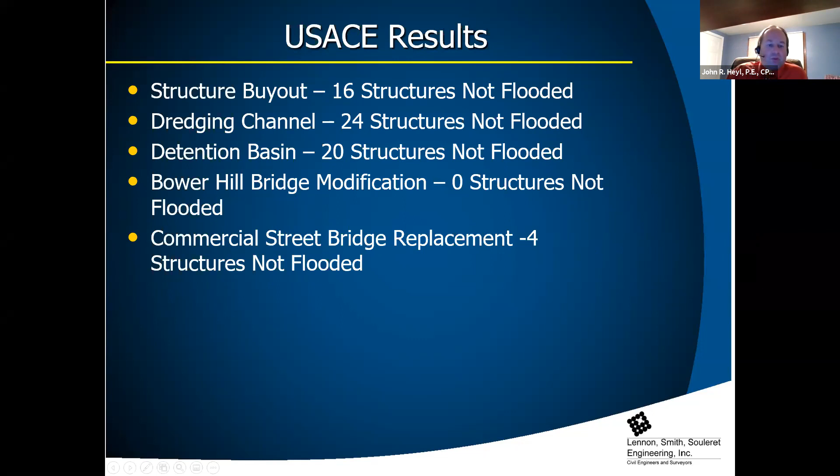So we took a little bit of a different approach at it. We reviewed all the scenarios that the Corps came up with. I dug into the model very deeply, did a little bit of preliminary work, ran some scenarios, some off-the-wall scenarios just to see what would happen, some realistic scenarios, and paid attention to what the back channel of Chartiers Creek did to impact the stream, what McLaughlin Run itself does, how it impacts the stream, and how the different bridges and stuff impact the stream.

So I truly understood what was going on before we came up with any alternative scenarios that we were going to actually model. We identified the critical restriction points within the stream, and then obviously I spoke with the borough staff, Public Works, a number of the council members and stuff. We went around and actually walked the McLaughlin Run corridor and looked at a few of the critical areas.

So some of the options that we looked at were construction of earthen levees to keep the water within the stream and no longer flood the structures, structural levees, bridge removal and replacements for the Bower Hill Road Bridge, Baldwin Street Bridge, and Commercial Street culverts.

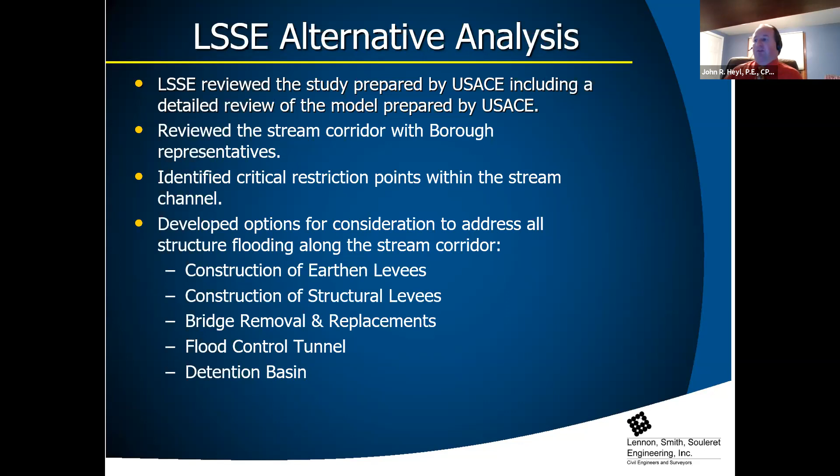I also looked into the detention basin up at McLaughlin Run a little more, to determine if there was a way to make that work to actually stop the flooding. The size of that detention basin would need to be up to 3 times the size of the ball field area, and we don't have that much property, so that became pretty much a non-starter.

But while we were doing all this, we were actually working with the borough, and we did a bunch of projects already. We've got some projects implemented, some getting ready to start, and we're going to have 2 meetings tomorrow to kick off 2 projects.

But the restrictions we truly identified as problems were, obviously, the Chartiers Creek back channel is the first and foremost problem. If the water is not flowing through the back channel, when the water from McLaughlin Run comes to meet it, it's got nowhere to go, and the model shows that very well. When you run the model, you'll see the back channel has a huge effect all the way up and beyond Bower Hill Road. If you were to completely eliminate Chartiers Creek, the water surface elevation in McLaughlin Run would drop exponentially, but obviously we can't eliminate the flow from the back channel.

Hey John, it's Tim. Can I ask you a question really quickly? Because I think it's important to the context here.

When you say you ran the model, or we would need 3 times the size of the existing, are you assuming the 100-year event is the input there? Yes, I'm sorry, I was going to get to that shortly, but yes. The 100-year model is what we're looking at. We can run the 2, 25, 50-year models too and see what they do, but I wanted to use the 100-year model. I don't want to call it the largest storm event -- there are bigger ones -- but that 1% storm event is the one that everyone worries about, the one that causes all the damage. So that's the one we focused on.

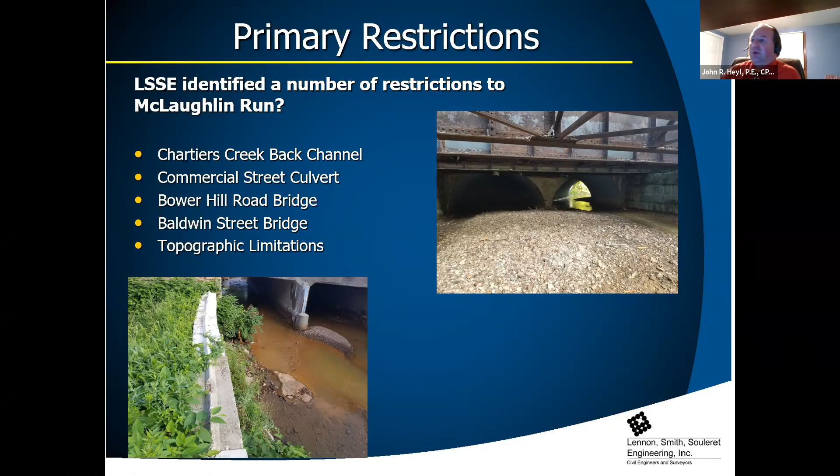And then these are the progress to date. I mentioned the commercial street. Another project we just finished was the Maple Street Wall.

One of the first things we noticed when going around is that the center of that wall wasn't a nice uniform sweep through there—it was made with some old gabion baskets that were starting to fail. There was basically an obstruction halfway around this bend, which you can see in the photo, and it created a hydraulic problem in this area, and the wall was also about 12 inches shorter than it should have been.

So the project, which was just finished, involved removing that center section and pushing it toward the houses a bit to create that nice uniform bend through there.

We eliminated the obstruction below, right at the base of the wall, and put a concrete cap on top of the wall to raise that elevation, so the cap is at the same elevation as the earthen berm across the creek.

In that area, the 100-year flood stays within those constraints, to an extent, except for the low end of Maple Street, where there's a ramp the borough uses to get down into the creek for maintenance when floods and everything gets locked up.

So one of our options is going to be to address that as well, so that water can't just back up that ramp and then back up onto Maple Street.

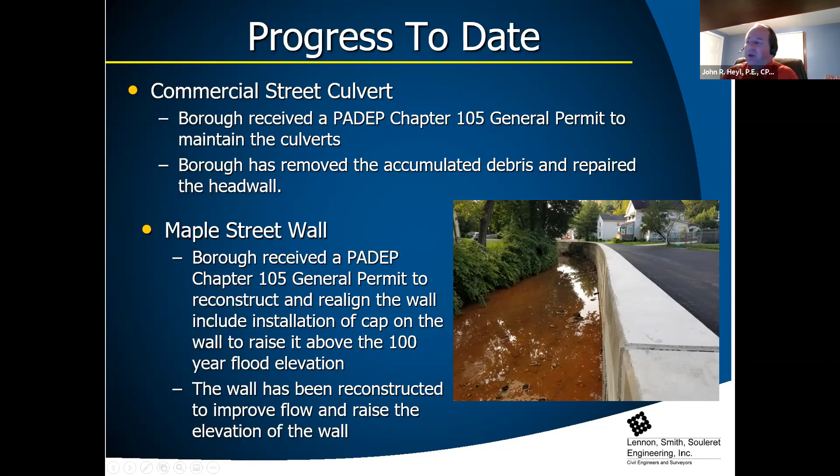We'll have that resolved with one of the options. But this improvement did have a good impact in this area—it actually lowered the water surface elevation one to two tenths of a foot, as well as eliminated the flooding coming around there.

I mentioned the Chartiers Creek back channel—we're currently working on a permit here. This photo is one I just took of the sandbar that has formed at the confluence of McLaughlin Run and Chartiers Creek back channel.

The entire back channel is completely filled—it's about 3 feet high above normal water surface elevation. It's a substantial amount of material that's blocking the proper flow of both creeks.

So we're working on getting a permit right now to get that material out of there and get these creeks flowing correctly. Once they start flowing correctly, that'll help downstream as well as upstream for both, because water velocity gets to where it needs to be, and it becomes self-cleaning, which is what we're trying to achieve.

We also have two projects that are out to bid right now, or actually out to construction. We have pre-construction meetings tomorrow.

We have the McLaughlin Run Park Flood Control Project. This project's been going on for a long time—previous engineers started it. We took it over, finished it, and got it approved, with permits through DEP and the Conservation District.

This is going to consist of constructing a trash rack in McLaughlin Run up at the park. Basically, it's going to be five 18-inch diameter steel caissons driven down into the ground.

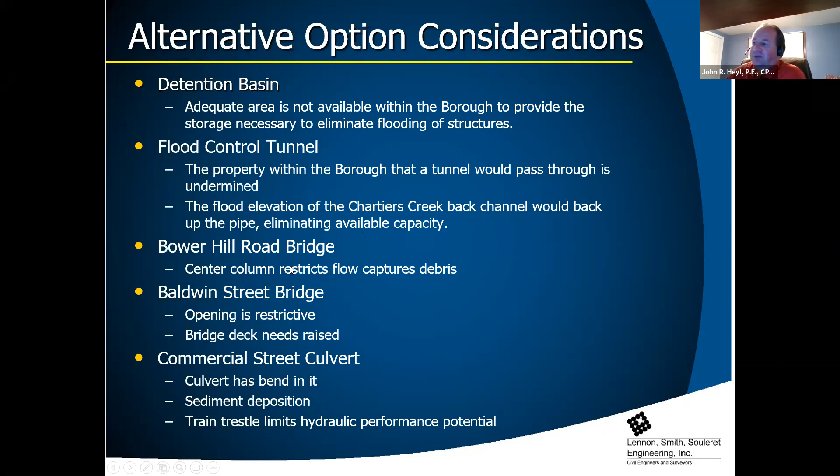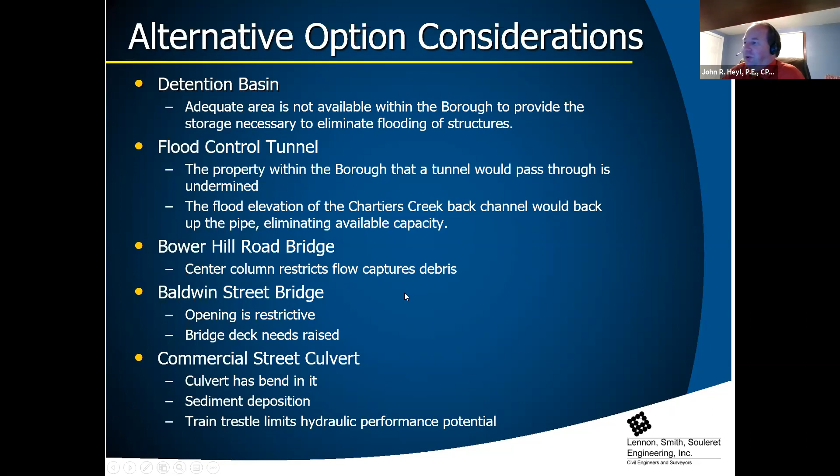One thing we do want to do eventually - and this is way down the road, won't be part of the flood control project, but something we need to do - is get the sanitary sewer out of the creek there. The manholes stick up all the way through that area. They're another debris catcher, and they're hindering flow to an extent. That's obviously going to take some work with Alcosan since it's their sewer, and that'll be a whole other conversation with a whole other project.

So we came up with 3 options that we really considered, looking at pricing and what the model did. Option 1 proposes improvements from the old skating rink all the way up to just past Baldwin Street Bridge, a little bit of work at Maple Street, and then some improvements just upstream of Maple Street as well.

What we did is we broke this into 3 phases. Phase 1 is from the skating rink to Commercial Street. Phase 2 is basically from Commercial Street, Bower Hill Road, up to Baldwin Street. And then phase 3 is from Maple Street up to the end of the proposed improvements.

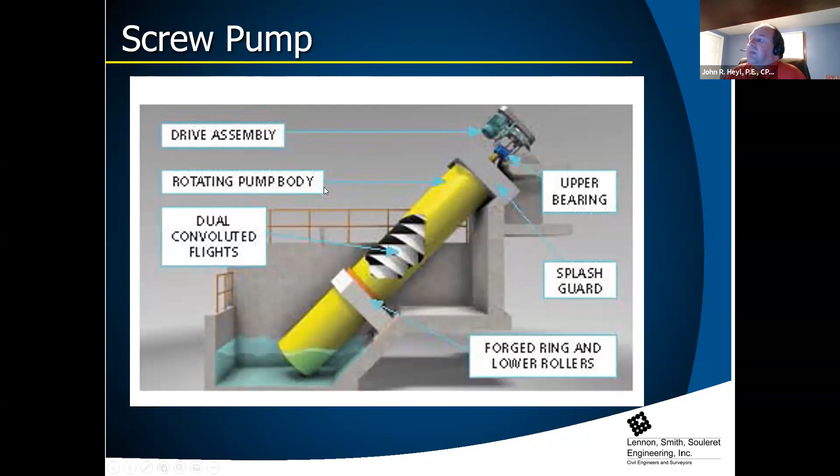Okay, phase 2. Phase 2 is from Bower Hill Road up to Baldwin Street.

Again, because of restraints of all the buildings that are tight against the stream, Bower Hill Road is right up against the stream. For this phase, for this option at least, we decided to continue the old Soldier Beam and lagging levee walls for both banks. We're going to do it on the left bank, and then we're going to also do it on the right bank. Now with this, we're going to eliminate the sidewalk along Bower Hill Road.

We're going to reestablish the pedestrian corridor up Baldwin Street and reconnect it into Bower Hill Road at McLaughlin Run. The reason for this is we want to get that little bit of extra space there for flood control and establishing somewhat of a floodway or a floodplain there in that corridor without having to significantly impact all the businesses and residential properties that are along Baldwin Street.

Again, we're going to have 2 screw pumps. We're going to replace Bower Hill Road Bridge. This is something obviously we'll have to work with the county with, because that's a county bridge. But we want to eliminate that center column and adjust the low chord of the structure.

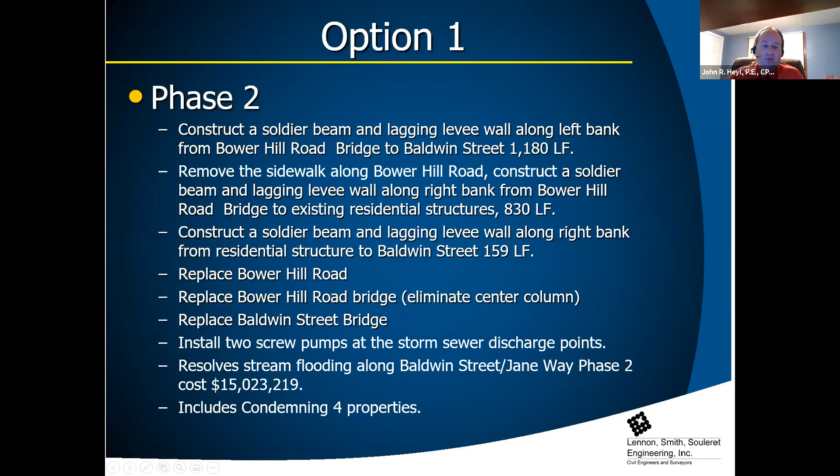Get this thing to continue to work. There we go. The properties that were going to be condemned are those 3 little houses along Bower Hill Road here, and the one structure that we called as to be condemned is actually, I found out just recently, had burned down, so it's no longer even an issue. But we'd have to condemn the property so we could do the work.

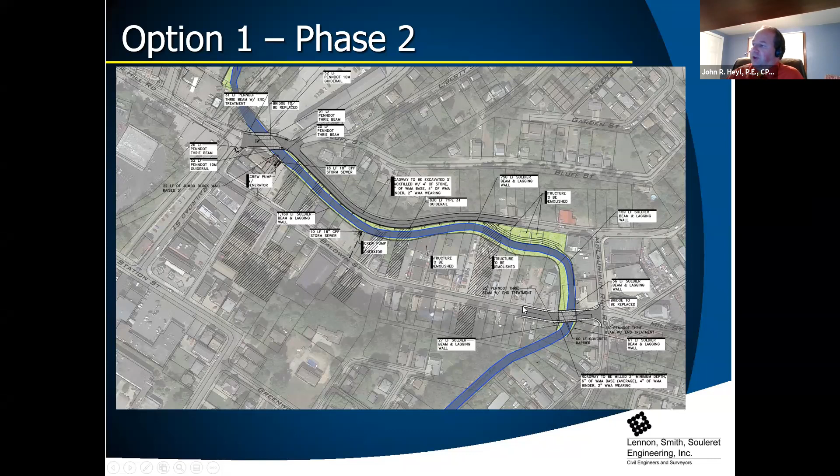As you can see here, here's the new bridge across Baldwin Street. There's a pedestrian walkway. We're going to reconstruct Bower Hill Road as well. As a lot of you know, there's been problems with Bower Hill Road. It doesn't hold up. A lot of that problem is the soils below this road.

So we're going to have a significant reconstruction of that road. But we're going to dig down about 4 feet and get that Play-Doh type soil that's in there out, and then bring in a bunch of stone to stabilize that road so they can actually handle the traffic it's getting. And we show the new bridge at Bower Hill Road, and the sidewalks are being revised to provide access to Bluff Street, but we're not going to have the access down Bower Hill Road anymore for pedestrians. There'll be signs to direct them to come down Baldwin Street.

Here's Jane Way. We have that access point built into this model as well. Here's the screw pump right at Jane Way. And then we have a screw pump just outside this view.

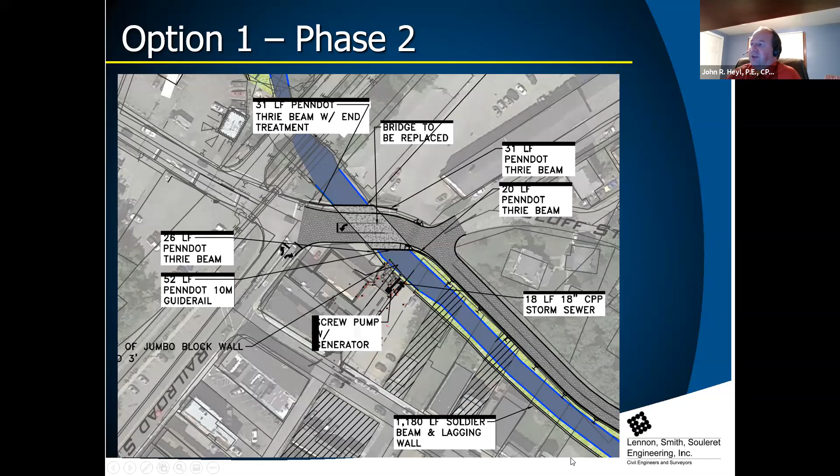And then here's what looks like a close-up of Baldwin Street Bridge. As you can see, all this green area, it doesn't exist as open area for water right now. The bridge is literally as wide as those 2 blue lines. So by doing this, obviously we provide a lot more room for water to pass underneath this bridge.

This was really telling in the model. I had to scratch my head a few times because the model shows a bit of a post-development jump just below the bridge. It's not an actual jump, but the water is no longer 3 feet higher on this side than the other side, because it can actually pass under now. So instead of going 3 feet higher and dropping down in a hydraulic jump, it shows going level. It was very telling that this bridge significantly impacts the flow of McLaughlin Run.

Okay, phase 3. Phase 3 is about the same for all 3 options, so phase 1 and phase 3 are the same across all options. Phase 2 is where the big changes are.

Yeah, these are like suggestions, right? Yes, okay, just check it. Oh yeah, there's 3 options for consideration of what we've come up with.

We can obviously put piecemeal stuff together with this. This is what we've come up with that works the best, the most cost effective. I know you're seeing some large numbers, I get it, trust me, but cost effectively these are the most cost effective. Other alternatives are a lot larger than those.

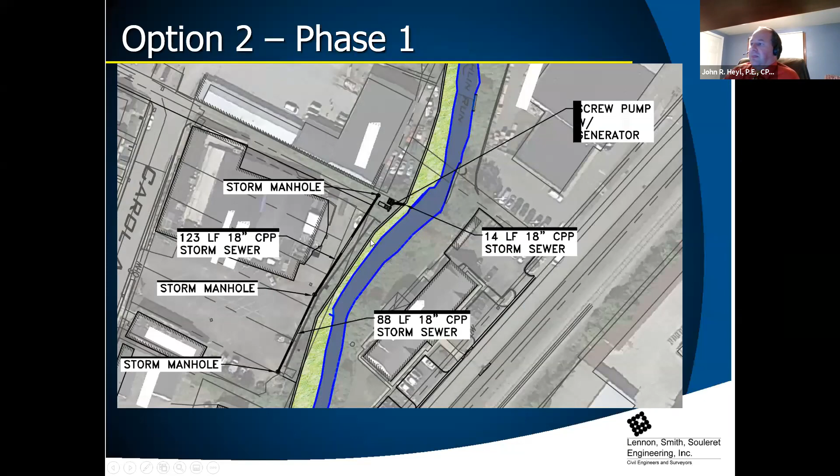Again, phase 1 is the same as option 1. Phase 2 has a soldier beam wall on both sides of McLaughlin Run from Bower Hill Road up to Baldwin Street. Baldwin Street Bridge gets replaced with a fiberglass pedestrian bridge, and we build a cul-de-sac on Baldwin Street so it's no longer a through street.

We install the screw pumps. This again resolves all the stream flooding. Cost for this one's $13.2 million.

We get to the end here, we're going to show you a comparison of the 3 options so you can see how the numbers change.

This one does include condemning 6 properties. 3 of them are those 3 houses. The 4th one is the one that recently burned down, and then there's 2 others right where the cul-de-sac's going to be that'll have to be condemned.

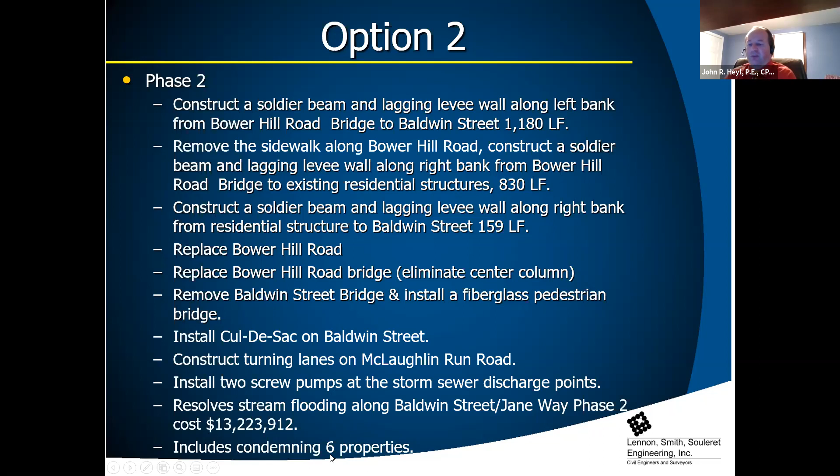So here's what it looks like. Again, this area stays about the same as phase or option 1. You can see the improvements of Jane Way there, bridge come down. Here's the cul-de-sac. Here's the bridge. Here's a nice blow up.

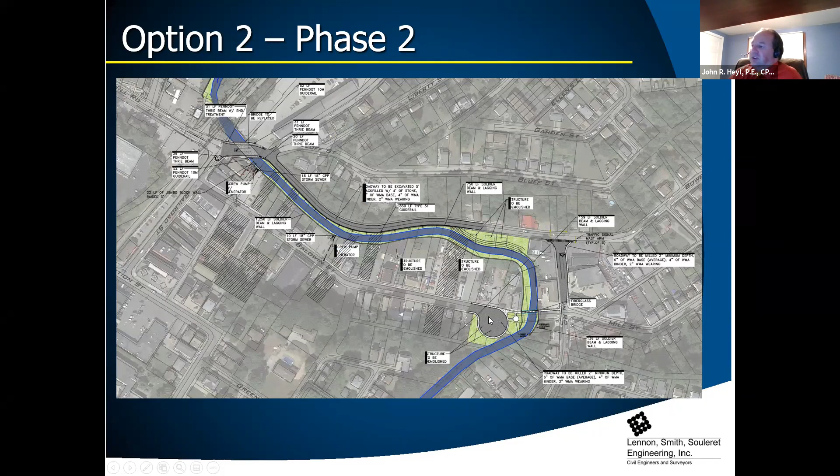I should have another blow up right here. So instead of having this, you can see this big rectangle where the old bridge was. Instead of having that huge structure there, you just have this nice little fiberglass walking bridge right here. So there's a lot less obstruction through this area for the water, which is what causes most of the flooding down Baldwin Street, because the water backs up here, flows right through here, and then down the road.

We figured we could put a nice parkette here with a gazebo. People can sit at, and it has the interconnection between the business section of Bridgeville and the more residential sections.

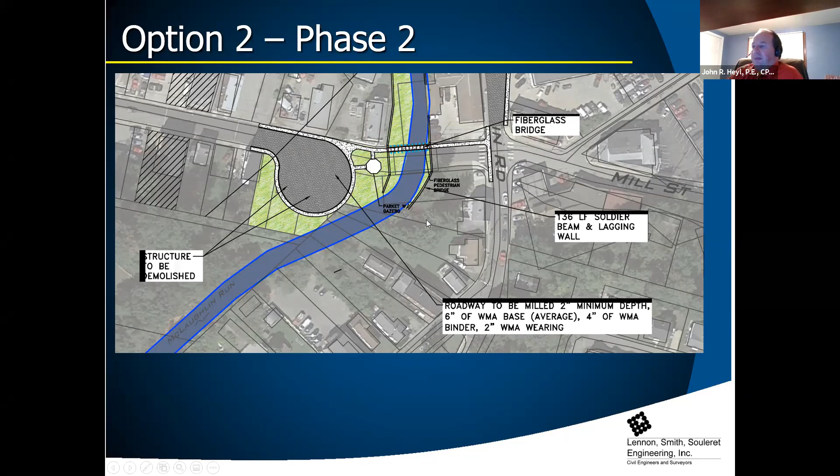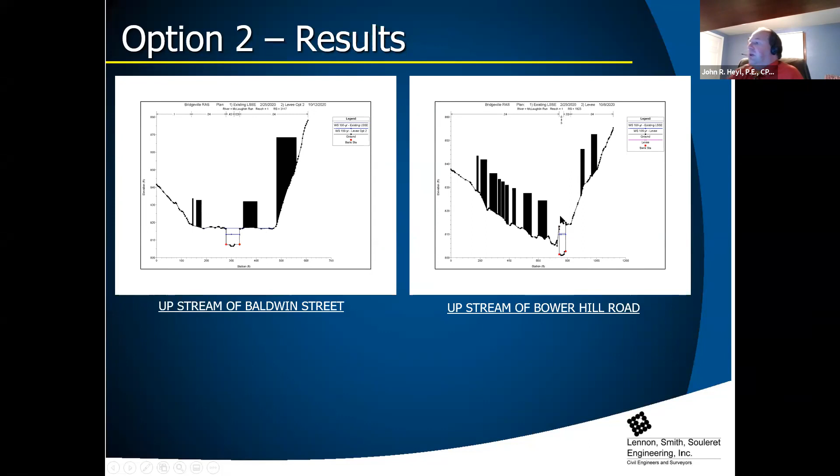And phase 3, as I mentioned, is the same as for all 3 options. And you can see it's got the same hydraulic impacts as the other. Actually, above Baldwin Street, it gets even more, it's almost like 4 feet of difference between pre and post. Bower Hill's the same, and so is Commercial Street.

And then option 3, now this is the one that's more out of the box. It's going to have a lot more impact. It's going to have a lot different look. It does a lot of good things, has a lot of negatives to it, but it's for consideration.

As I indicated, phase 1's the same, and phase 3 is the same as the other 2 options. Phase 2 is significantly different. We're going to completely eliminate Bower Hill Road from the intersection of Bluff all the way up to McLaughlin Run.

So we're going to use that area to widen the stream, provide a slope, provide a riparian corridor through there. We're going to build an earthen levee on the Baldwin Street side of this.

Plantings, you can see all the green areas is basically going to become park area. We're going to reconstruct the intersection at Bower Hill Road and Railroad Street to have more of a plus intersection, a more functioning intersection. And then we're going to do a roundabout instead of the traffic light at Baldwin Street and McLaughlin Run, with a little stub for Bower Hill Road just to service those few, the church and a few houses that are along there.

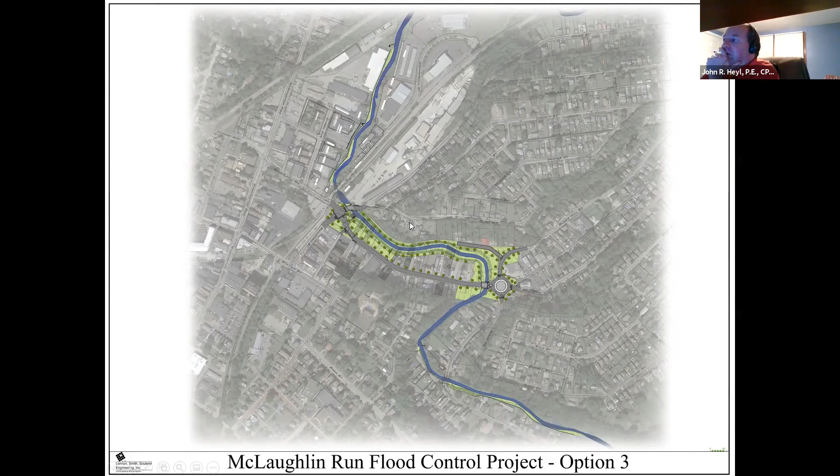And then reconnect the Bower Hill Road with a different road system. As you can see through this, and let's get to a blow up in a second here, it's going to have some significant impacts.

Let's get past this. So as we indicated, we're going to remove Bower Hill Road from Railroad Street all the way to McLaughlin Run. We're going to reconfigure the intersection at Baldwin Street and at Bower Hill Road. Reconstruct that bridge. That bridge now gets a lot smaller at Bower Hill Road because we're not trying to get Bower Hill Road across it.

So it gets a much smaller structure, which reduces the cost of that bridge, but it also reduces the impact it has on the hydraulics. Then obviously we're going to replace Baldwin Street Bridge similarly to what we did in option 1, to accept the roundabout that we proposed.

This option gets you a nice vegetated riparian buffer through this corridor instead of the urban stream channel that we have now and that we would maintain with the other options.

The big thing with this is, one, you're condemning 37 properties. That doesn't sit well really with myself, but it's something to consider. And then price of this just for phase 2 is 16.9 million. So it's a huge cost for this option.

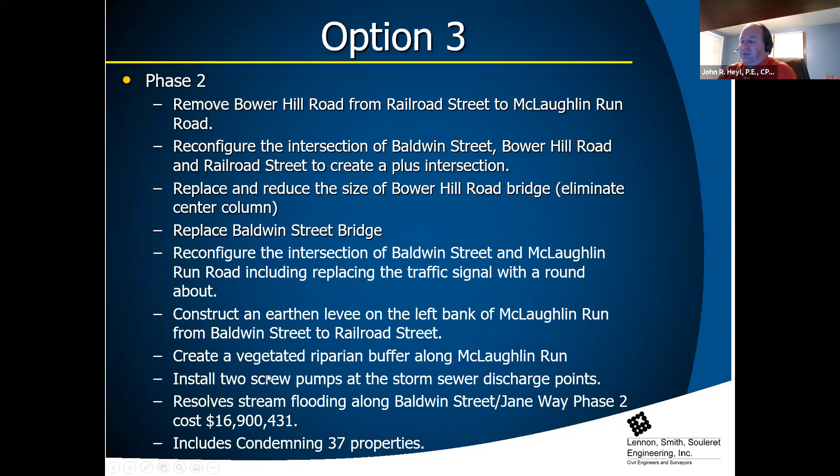Here's a blow up of it. You can see the new intersection and how it would work. Here's the roundabout. This kind of mimics, to an extent, the master plan that EPD came up with. After you do all this, there is a piece of land here that would definitely be redevelopable. It could be resold and repurposed for commercial use or residential use, whichever the case may be.

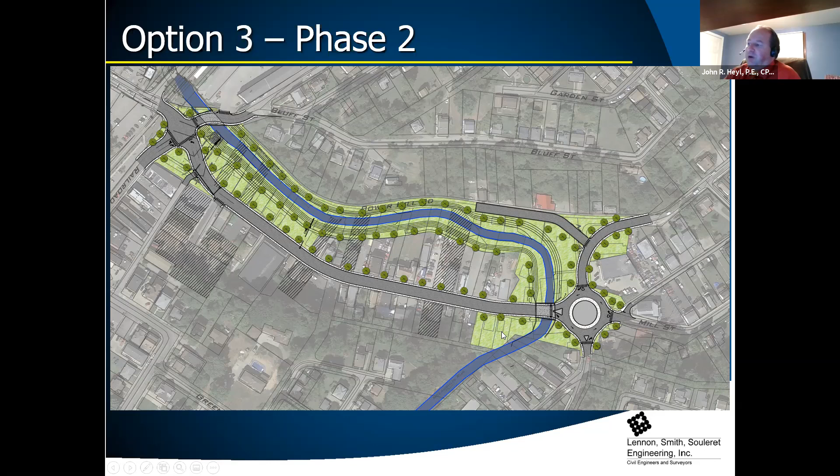Some of these properties, even though we have them shown green, you could probably repurpose these parcels as well because they won't flood anymore.

Here's that intersection at Bower Hill Road. As you can see, this bridge is a lot smaller. There's the old bridge way out here to here. Now it stops here, so you're reducing the amount of bridge there. You're widening the stream through here significantly. The floodplain gets a lot larger here, so we have a lot more area down at the stream for water to be instead of it being up above. So the water surface drops.

And then here's the roundabout. Ties into the alleyway, ties into McLaughlin Run. There's Bower Hill Road will come in like this, and then there's the little road stub. As you can see, this bridge kind of matches up with the phase 1 bridge, or the option 1 bridge for the most part, other than it'll change slightly to allow for the curves for the roundabout. And then obviously this gets rid of the traffic signal there with the roundabout. PennDOT would be involved with this because this is their road and they're going to have significant comments on the roundabout option, but they are promoting roundabouts everywhere, so they should like that.

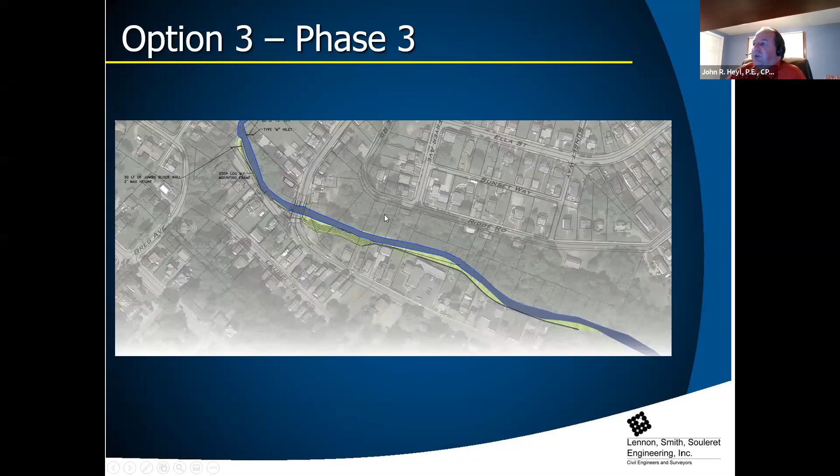Option 2 is the one with the cul-de-sac and the pedestrian bridge. It's 19.6 million. There's 6 properties condemned with that and 6 structures demolished. And then option 3, which is the riparian buffers option, it's 23.35 million, a good 4 million more than option 2. 37 properties get condemned, which means no tax revenue from those parcels anymore. 27 structures will be demolished.

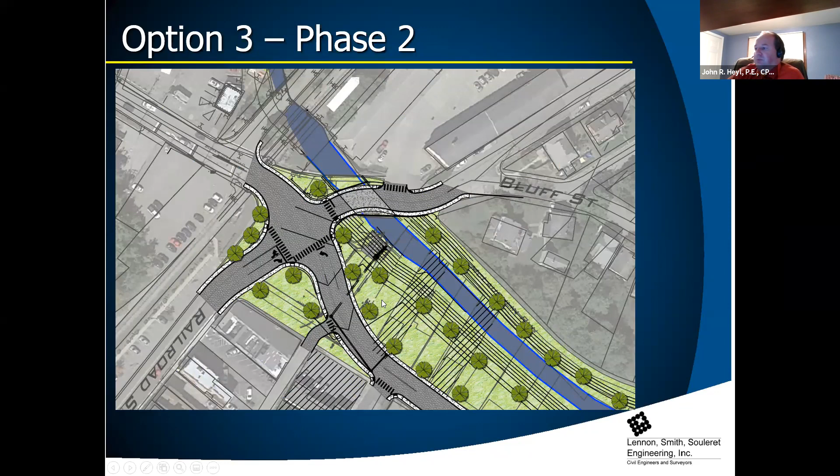There's a lot of businesses in option 3 that would be eliminated that are profitable businesses that I personally don't see as a feasible scenario to tear those buildings down. There's a number of businesses here that are flourishing, and a few along here that this is going to greatly impact.

John, do those costs include any of the property acquisition, or is it pure construction? Yes, they do. It includes everything. We included the cost for acquisition, cost for demolition, construction costs, all inclusive.

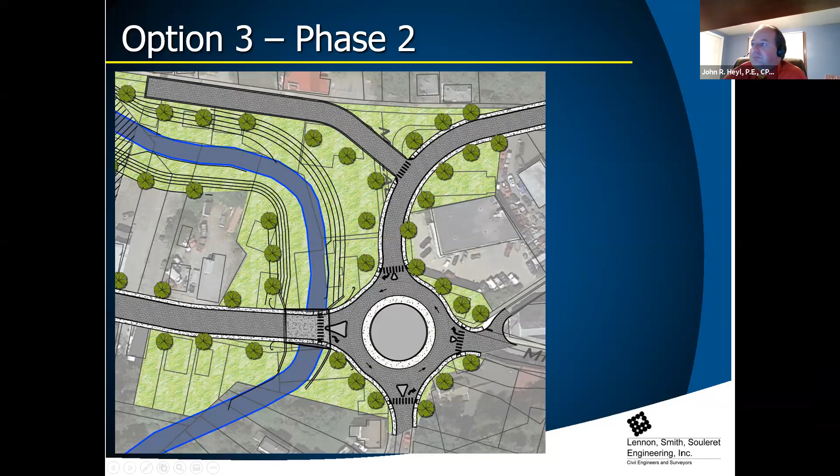So John, I have a question too. Either of these plans, option 1, 2, or 3, you mentioned earlier that you do this and the property owner's insurance will go down. It won't be considered floodplain. If we did this, would this area be taken off, considered a floodplain, so to speak? And is there different levels? Is option 1, are they all the same?

Basically all 3 of these options get us the same result. Nobody's structure is getting flooded anymore. Of course, some of the structures are gone, so that's why they're not getting flooded, but there's no longer any structures through the corridor getting flooded. So what we do is after we get this constructed, however we end up finding funding to do so, we'll do the letter of map revision, submit it to FEMA. Takes about 8 months to get through with them. I just finished one up in Indiana, PA. Once that map's revised, every one of those parcels will no longer show the structures within the floodplain.

Which means they don't have to pay the increased flood insurance rates. They wouldn't be required to have flood insurance to get a loan or for someone to buy the property. So if they're not required to buy flood insurance, it'll be a significant savings. In fact, some of these structures along this corridor, the flood insurance will be well above the house payments per year. If you pay $12,000 a year for your loan, you may be paying $14,000 to $16,000 in flood insurance when FEMA's all said and done.

Obviously the costs and the impacts to the community with how many properties get condemned are the big considerations on these projects, and what character you want.

Lennon Smith, we're kind of leaning to option 2. We kind of like making Baldwin Street the pedestrian corridor, getting people off of Bower Hill Road, because even though there is a sidewalk there, it's not the safest situation because Bower Hill Road is narrow and very heavily trafficked. So getting pedestrians out of there is actually a good thing in that aspect. It has the lowest cost overall.

And I think it provides some good amenities for the community. Option 3 would be great if it made sense, but it doesn't make sense to me, and doesn't make sense to the rest of our office. Losing 37 properties and the tax revenues available from them just doesn't seem appetizing. And then option 1 pretty much keeps the character of the borough as it is, for an additional $2 million.

John, I got a couple of questions for you. Sure, this is Dale Livingston. Phase one goes up through Bower Hill Road, from Bower Hill Road to the skating rink, down to the back from commercial, from the downstream end of Commercial Street to the skating rink. So you remove that center pier from Bower Hill Road to help make stuff flow, water and debris flow through there.

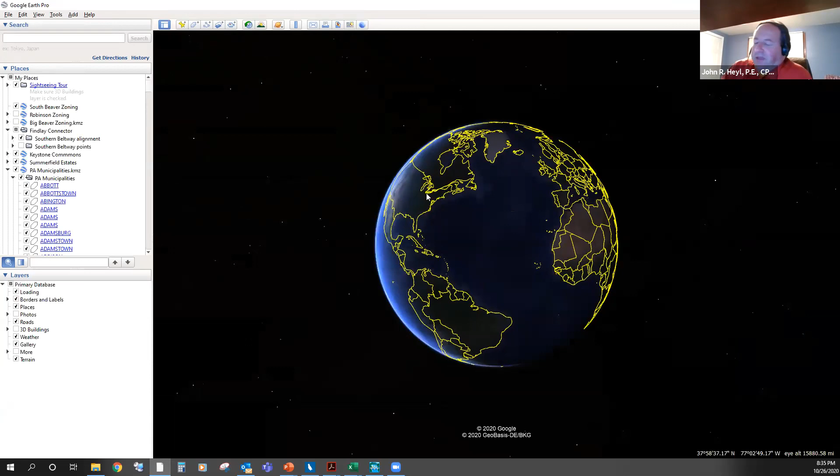The gate system there is not functioning, and it's not letting water down through to flush out and clean out the back channel. So the back channel sediments in. I don't know, Larry, if you saw the picture at the very beginning of the presentation of what the confluence of McLaughlin Run and the back channel looks like right now. There's a 3-foot island that's got the entire confluence filled in right now.

Yeah, I saw that. So let me ask you, who's responsible for maintaining that? Well, theoretically, the flood authority is responsible for the back channel itself. Before Joe was involved, we were trying to get some discussions with the flood authority to get them to look into doing something, and we weren't very successful.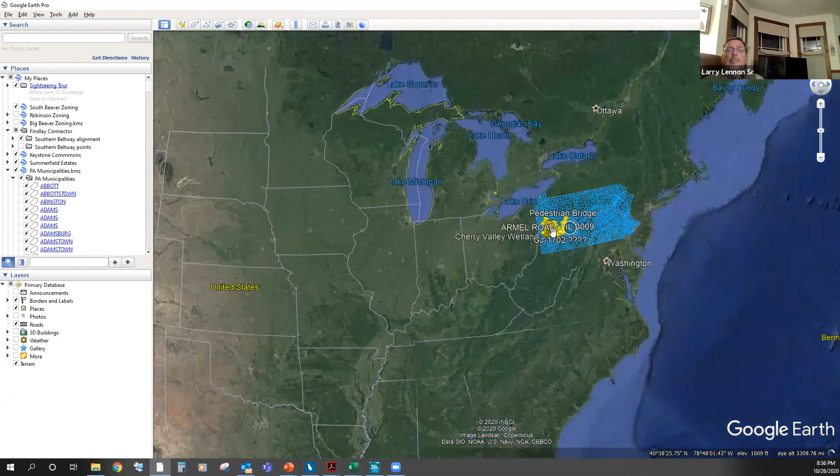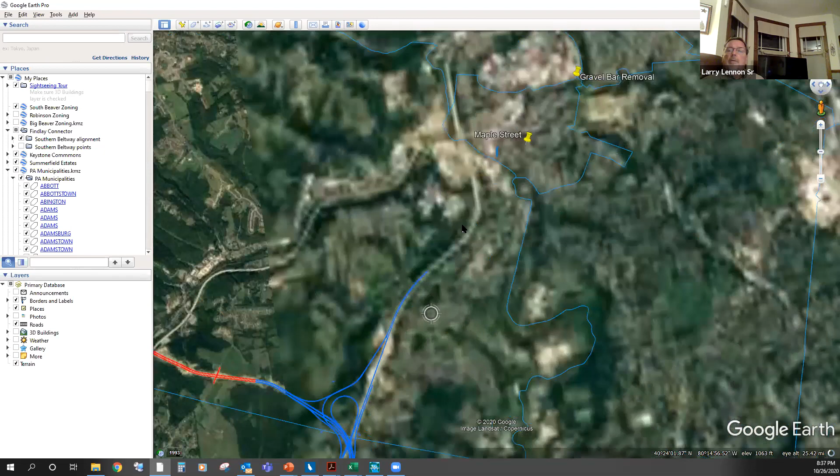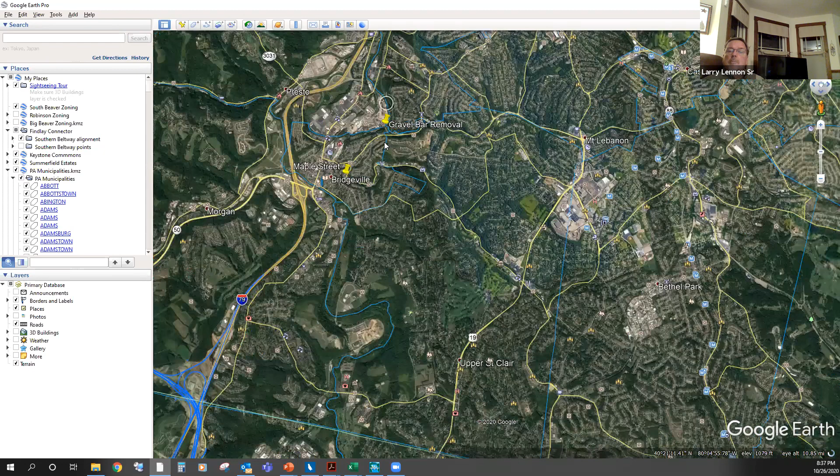Is it still Dan Dizerat, the engineer there? It's Joe. Yeah, it's Joe Sites. Gateway. Does Bridgeville appoint anyone to that board? Yes. Joe Coward, do you know, or does anyone in council know? Yes, we do have a board appointee. Larry, yes, there's an appointee to the board. Who is it? I believe it's still Joe Mejia.

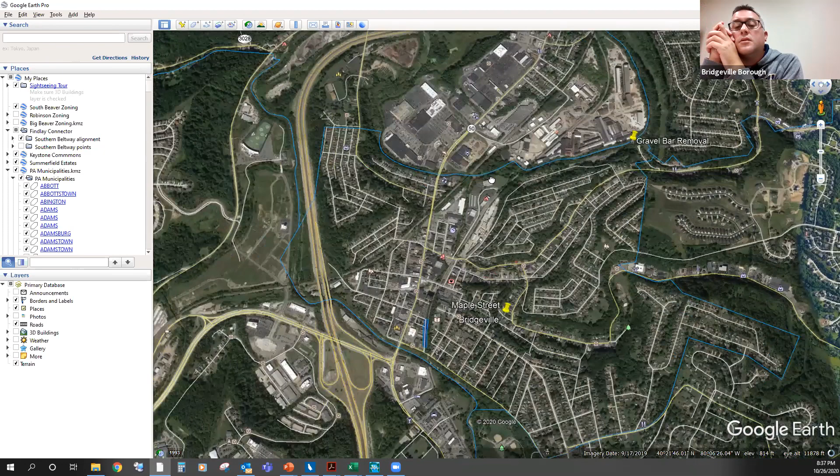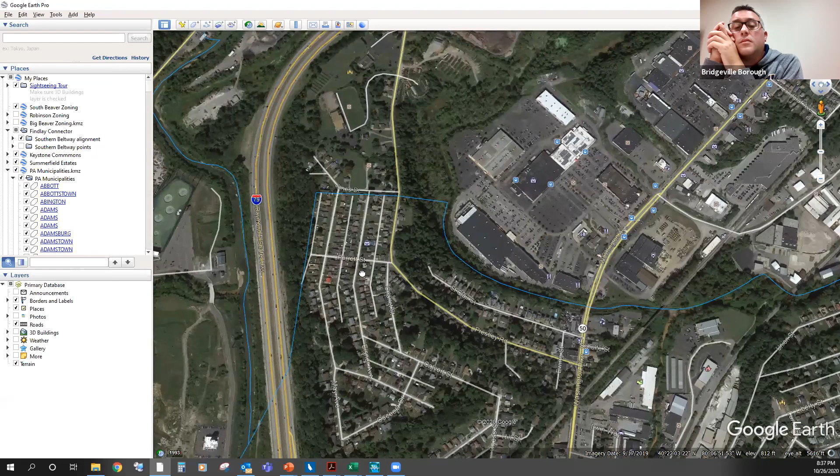So this is Jack, this is the asphalt plant, Larry. I don't know if you can see the screen. Yep, I can see it. This is Jack Cardoni's property, right. This is the back channel right here. That's the back channel there.

Is there a weir there? Yeah, there's a structure here. What kind of structure is it, do you know? I haven't got my hands on copies of plans yet on it. I've been trying to find them. That's one of the things I would like to push, is to get that thing functioning so this can be cleaned out some. It looks like there's a dam across the channel when you zoom in.

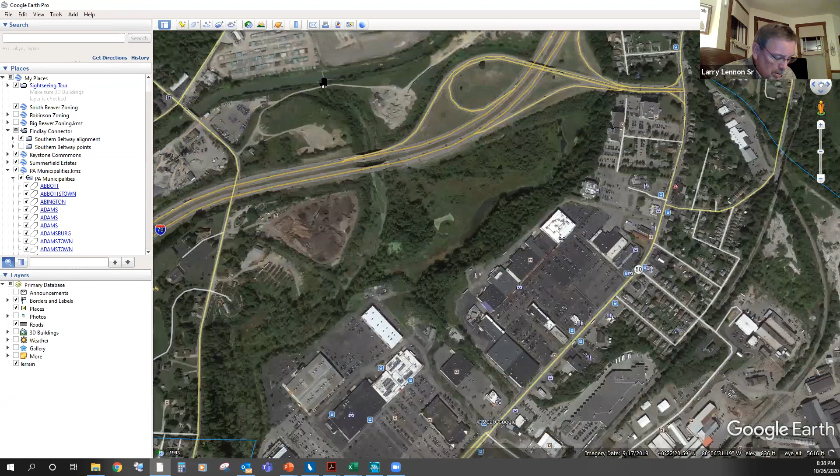Yeah, looks like Cardoni's did something, right there. Right up above there a little bit, right across the main channel. Yeah, it's a little splash pad weir. It's like a wall. You're right, it is a dam.

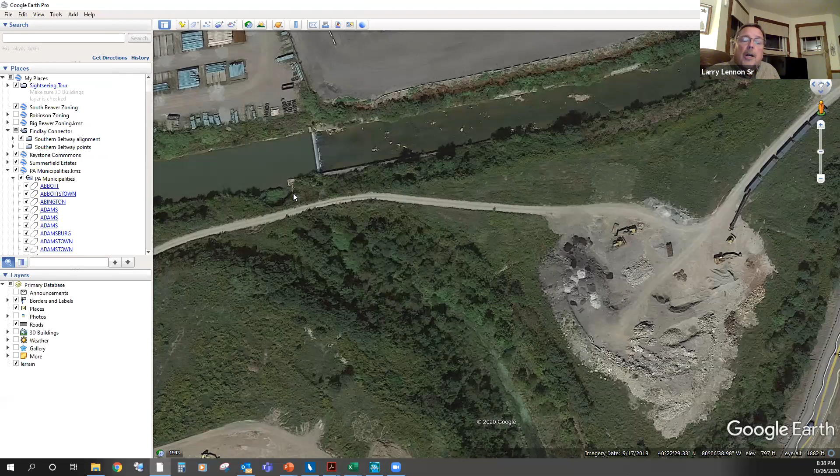It's not a dam. The theory is this thing was designed to regulate flow and provide sufficient flow to flush the back channel. And the back channel is probably sedimented in from the beginning to the end, and so it doesn't flow.

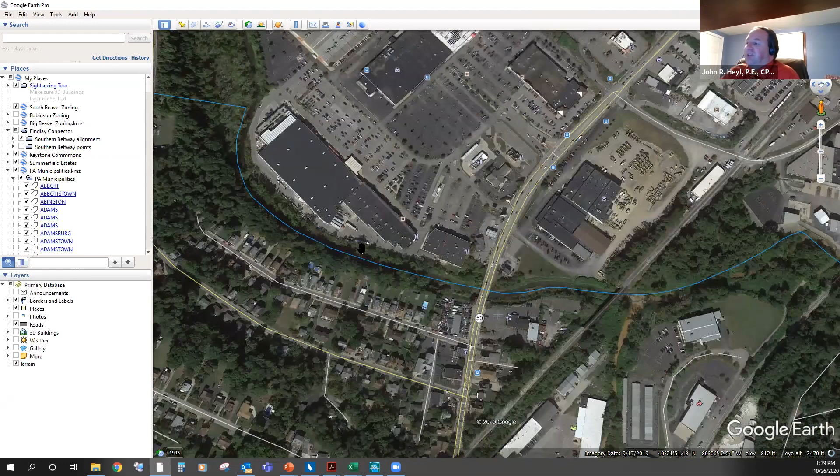So how much does that backwater impact this flooding model? Very, very significantly, actually, especially the lower section. If you had free discharge, let's just assume that you cut your model off and it dropped into a black hole. What impact did that have on the flooding in McLaughlin Run?

It would drop this lower section. Just the lower section. Well, we'll just start with the lower section because that part I'm really familiar with, it was dropping it approximately 3 feet. And then it works its way back as you work your way up. Would the 100-year flood be within channel bank? Yes, yes, very close, yes. So if they just maintained a free discharge, that flooding in the lower end could be eliminated.

And when you say that, I'm assuming you mean from like Commercial Street to the roller rink. Right, yes. All right, so then when you move upstream from there, the next section, what is it that's the controlling factor for flooding there? Is it the Baldwin Street Bridge? Because it backs up so high behind it, it backs about 3 feet above the bridge deck.

That's assuming unimpeded flow, right? You're not thinking that there's debris caught on anything. That's just the limiting capacity of the bridge opening.

Correct. So the hydraulic model goes about 3 feet above the bridge deck there, which means water is pouring down Baldwin Street and flooding properties.

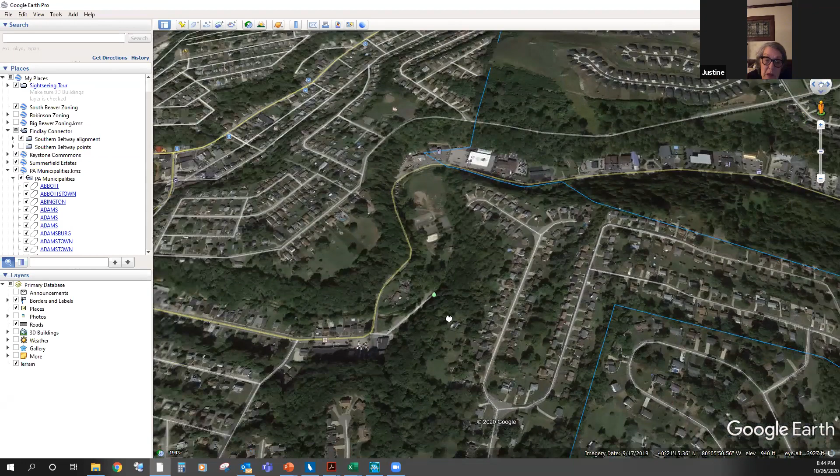Yeah, that shouldn't be the case. If I can say one thing, a couple of things actually - I personally own property across from that Upper St. Clair acreage for sale, and I do have the mine maps because I've had them for about 8 years now. Not only are you looking at a developer that owns 21 acres of that property, you're also looking at a person that owns 3 lots at the flattest spot closest to the creek.

Bridgeville owns a little bit of that, I forget which. We discussed it last year when we talked about accessing it, when Upper St. Clair or the developer wanted to access that property and build. We have a conservation zone up there, right? Correct. But again, that whole area is undermined.

But also, the development on top of the hill - I forget the actual name of the development - does have a retention pond at the creek. They never do anything with it, but they consider it a retention pond. I do believe I still have the drawings for that.

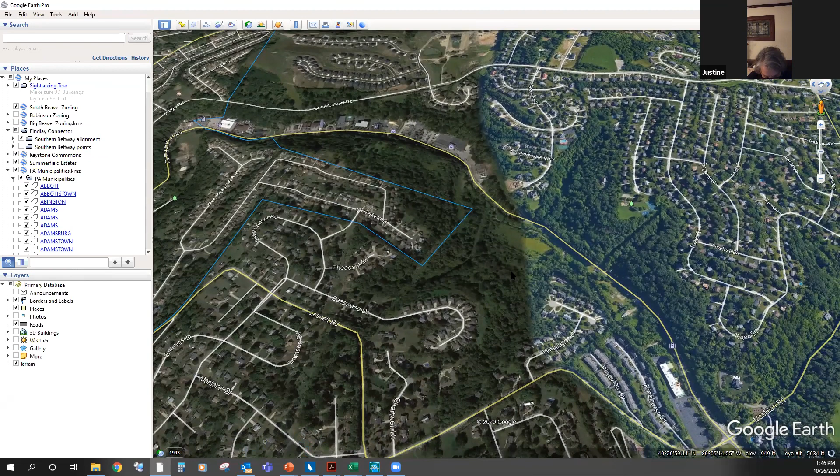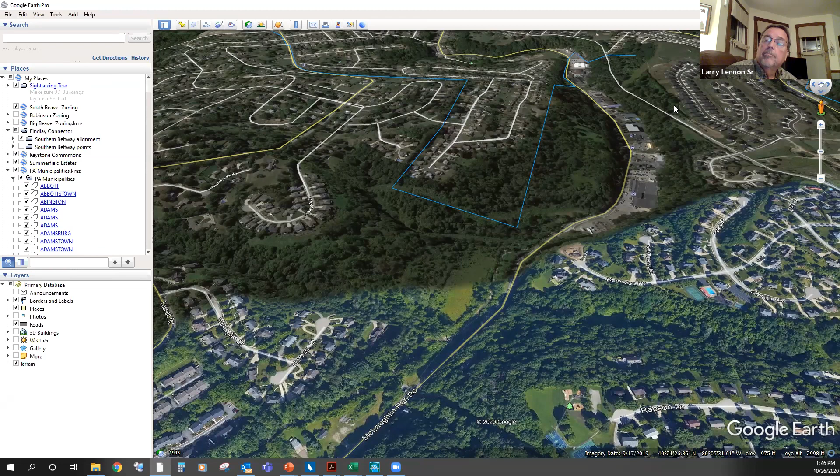And that property's up for sale. Oh, 21 acres. That property is basically not developable for a lot of reasons, not the least of which is they needed to take our conservation land to make some of their alternatives work, and we had that discussion. Presumably they went away. Well, they have a different realtor now, so who knows what's going to happen.

Okay. Tim, Mike, you got any questions?

Just back on the funding, John. I mean, obviously these plans start and stop for a borough like Bridgeville with funding. Experience-wise, what's the percentage that we could be hopeful about actually getting funded, as opposed to are we talking about single percentages and we've got to do the rest of the lift ourselves? Or, if we pursue that in the right way, can we get the lion's share of it paid for? I'm not looking to lock you in, just give me a sense of whether there's even something to pursue here.

I believe the lion's portion of this can be funded through grants and some small loans, but most of it I believe we can get through grants. Like I indicated, we've received a significant amount just in the past year for flood control projects. We got basically $500,000 last year for flood control projects between Bower Hill Road, McLaughlin Run Park, and Janeway.

John, do you know what the relationship is between the Corps of Engineers and the Chartiers Flood Authority? Sorry, didn't hear a word, Larry. I apologize, do you know what the relationship is between the Corps of Engineers and the Flood Authority? I mean, who does the Flood Authority answer to, I guess, is the question I'm asking.

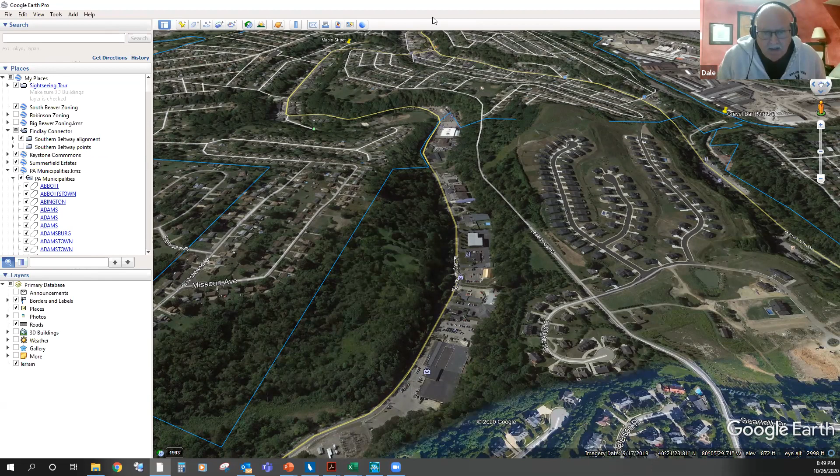BJ's put a question up, asked who maintains the levees - screw pumps, etc. Is that the borough? Just screw pumps would be the responsibility of the borough. The levee wall, it wouldn't be much maintenance to them - it's a steel and concrete structure.

And what sort of costs are you looking at for maintenance with the screw pumps and generators? I don't have a solid number right now on it. Obviously, a lot of it is driven by the final design of those, what the costs are. If it's a very simple system, which is what we'd like to do, the costs are minimal.

You do a little bit of maintenance on your diesel generator, and what we've talked about doing is making the diesel generator the primary source of electric, and Duquesne Light the secondary. That way they get exercised, because one of the problems with generators is they have to fire up and be exercised. So that's one of the things to keep in mind.

So the maintenance for a screw pump is only going to be about $1,000 a year at most.